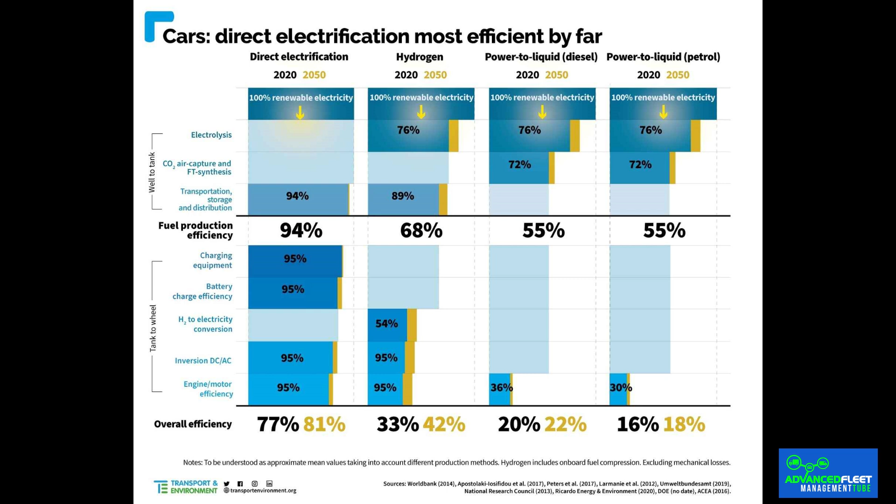Then adding transportation and distribution until final consumption by the vehicle, we would reach 33% energy efficiency for hydrogen and 77% for the electric car, and 16 and 20% for a gasoline or diesel car. By 2050, the performance of all these technologies is expected to have improved, but the differences will continue to be notable: 81% for direct electrification, 42% for hydrogen, 22% for synthetic diesel, and 18% for synthetic gasoline. Therefore, the use of batteries will continue to be a much more efficient solution for light transportation than other alternatives.

If the hydrogen car is zero emissions, where is the problem if in the end 60% of the energy generated is lost? In principle, and being from renewable sources, one might think that it is not a problem. However, energy needs are increasingly important, and at the same time, Europe has managed to consume less energy than about 10 years ago, mainly thanks to increased energy efficiency, according to the European Environment Agency.

The goal is to further reduce energy consumption despite the needs, which could also be interpreted as a way to achieve energy independence. But also, lower energy efficiency would mean a higher cost. For Transport and Environment, it is particularly evident in the case of road freight transport.

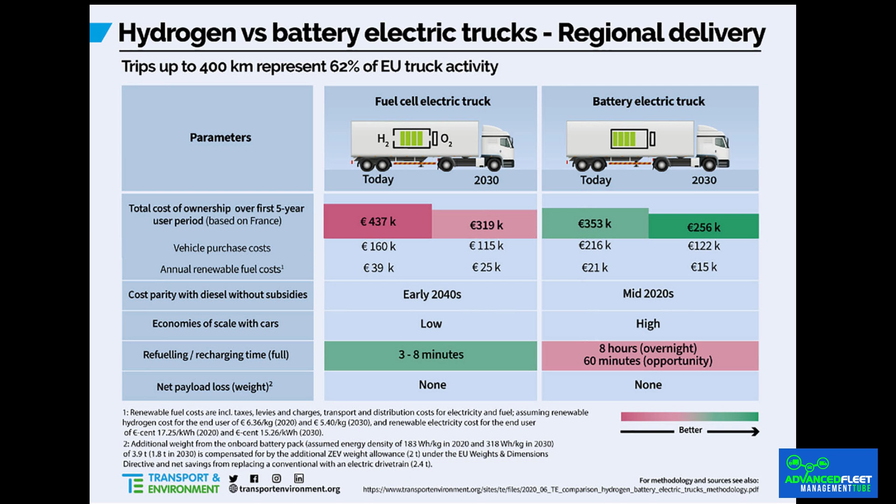Hydrogen in the transport of goods by road. In the case of road freight transport, hydrogen could still make some sense for long-distance travel. According to data from the European Commission, 62% of road freight transport journeys are less than 400 kilometers, and 78% of journeys are less than 800 kilometers, which would be equivalent to a full day of 8 to 10 hours. These are trips that you would not need to refuel or recharge to complete.

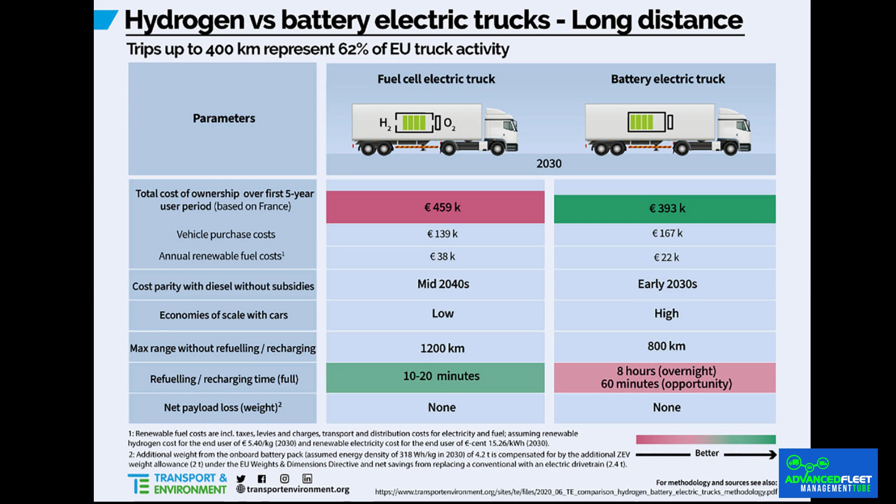Instead of having to wait 8 hours or more to recharge the battery, the hydrogen truck could refuel in 3 to 20 minutes, depending on the range you want. According to Transport and Environment, the unit cost of an electric truck will be higher than the cost of a hydrogen fuel cell truck. However, the cost of energy would play in favor of the electric truck, being cheaper than hydrogen. There is talk of €38,000 per year in the purchase of hydrogen in 2030 and €22,000 per year in electricity.

Hydrogen obstacles: lack of infrastructure and complex logistics. Currently, you won't see many hydrogen cars on the road. The enormous lack of charging infrastructure, even in Northern Europe where it is more developed, is an obvious brake on someone being able to buy this type of car. In Spain, for example, there are currently 7 hydrogen stations throughout the territory, and they are all private.

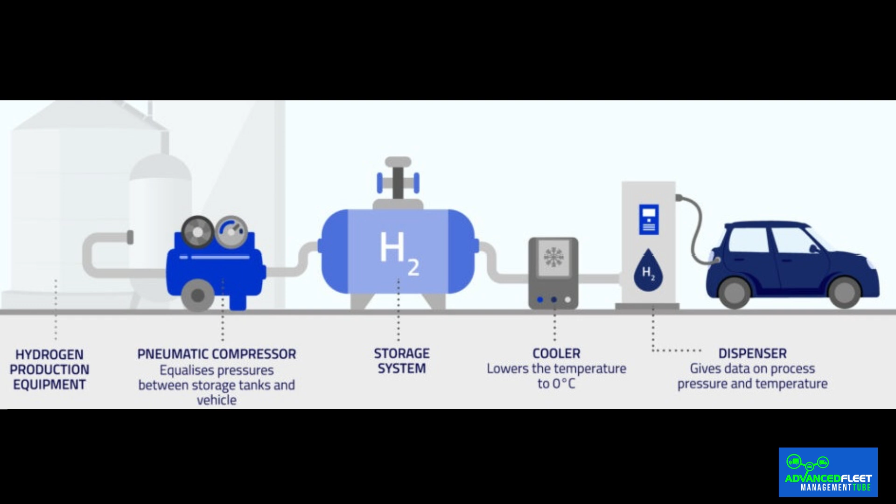This explains why, at least in Spain, Toyota does not sell its Mirai to the public, but only to companies that have a charging point. The installation cost of a hydrogen generator exceeds 1 million euros per unit and has enormous operating costs, and the legal obligation to store 1 ton, for example, does not simplify development. Several billion euros will be needed to cover an entire country.

There are only 5,000 kilometers of active hydrogen pipelines, mostly in Europe and the United States, and they are small installations with diameters of less than 45 centimeters, all above ground. There are no underwater ones, and the large part merely connects refineries with chemical complexes. There are nearly 30,000 kilometers of hydrogen pipelines in the project.

For example, the corridor that wants to link the ports of Algeciras with Rotterdam, with an investment of 3,000 million euros. But according to the International Energy Agency, only 100 kilometers of the hydrogen pipelines have firm investment. It is expensive to produce, which means that currently on the market it costs almost 8 times more than gas, 230.53 euros per megawatt hour, according to the newly arrived Hydrix index.

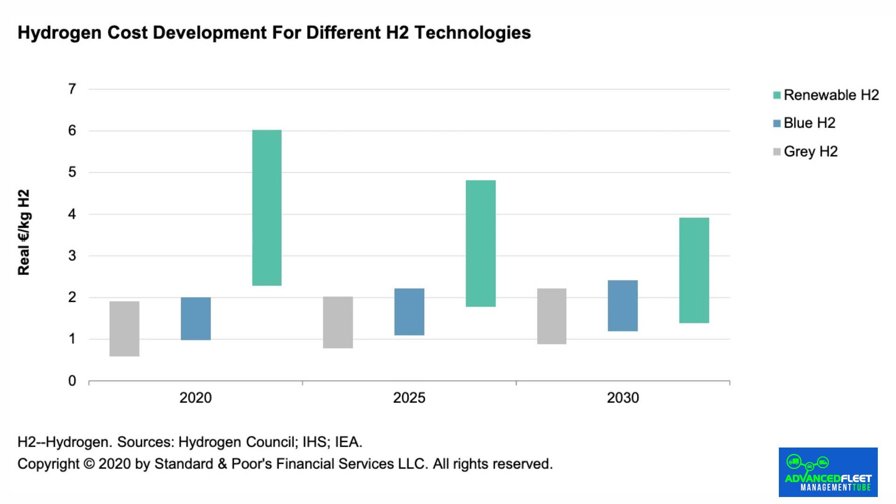The International Energy Agency estimates that in 2030, the cost of producing green hydrogen will be around $1.5 per kilogram, a figure that still seems distant. The data does not suggest that this will change in the short term. Although there are more than 40 countries with hydrogen strategies, only 4% of green or clean hydrogen projects have a firm investment decision. Hence, for example, green hydrogen, at least for now, cannot be a real alternative.

The price is prohibitive, about 18 euros per kilo, knowing that 1 kilo of hydrogen allows you to travel approximately 100 kilometers in a car. Without going into details of how much it costs to produce green hydrogen, the reality is that the price of filling the tanks of a hydrogen car is not much cheaper than recharging the battery of an electric car. In the Netherlands, with a price of 19.95 euros per kilogram, equivalent to about 40 kilowatt hours, we would pay 0.50 euros per kilowatt hour.

It is more or less the same as in most public fast charging stations, and that is whenever you want to refuel, while with an electric car you can always use much cheaper slow charges or home charging if you have a charging point, where recharging a 70 kilowatt hour battery can cost less than 17 euros, at 0.24 euros per kilowatt hour in the worst case.

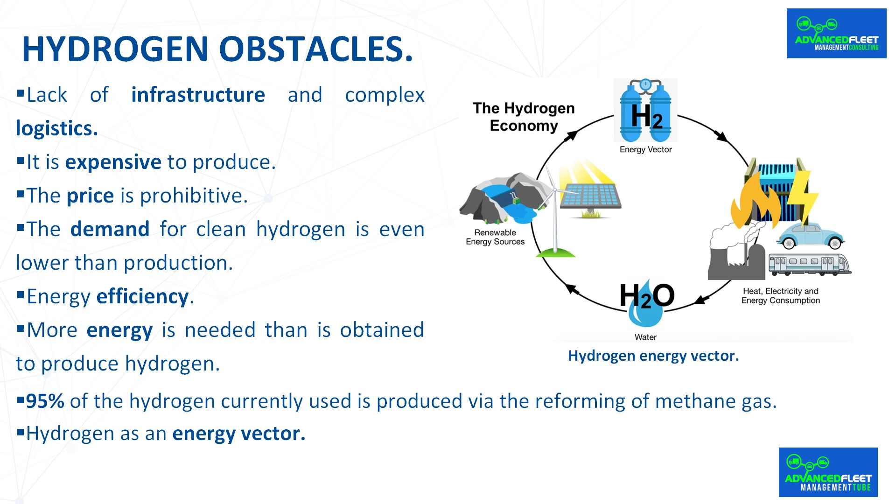Hydrogen as an energy vector. In the end, although the hydrogen fuel cell once promised to revolutionize the automotive industry, it has struggled to compete with rapid technological advances and widespread adoption of battery electric cars.

Regional production potential and investment risks. The technical potential to produce green electricity, and therefore green hydrogen, far exceeds estimated global demand. However, the ability to produce large volumes of low-cost green hydrogen varies greatly from region to region. Africa, the Americas, the Middle East, and Oceania have the greatest technical potential, but their realization depends on a number of factors, such as existing infrastructure, the current energy mix, the cost of capital, and access to the necessary technologies.

Factors such as government support, investment climate, and political stability will play a crucial role in determining whether this potential can be realized. Despite higher project financing costs in countries with higher risk profiles, green hydrogen investment is likely to continue to flow to these regions, provided the revenue potential is sufficient.

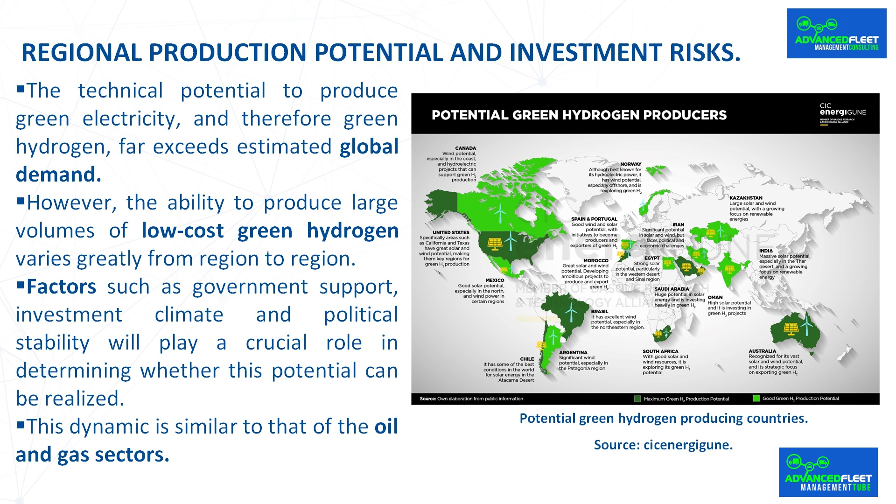This dynamic is similar to that of the oil and gas sectors, where investment often occurs despite significant national risks. However, this trend has its limits, as countries experiencing turbulence may find it difficult to attract investment due to the immense risks involved in doing business in such environments.

Ways to produce hydrogen. Hydrogen is the most abundant chemical element in nature and is a crucial resource for the energy transition. Under normal conditions, it is in a gaseous state. It is tasteless, colorless, and odorless, and it is not found freely in the environment, but is associated with other elements such as water-forming organic compounds.

As it is not a fuel that can be taken directly from nature, in order to be used in energy applications, it must first be released or separated from the rest of the elements, so it has to be produced or manufactured. Hydrogen can be produced from different raw materials, different energy sources, and by different procedures. Depending on the raw material and the energy source used to produce it, we may speak of 100% renewable, 100% fossil or hybrid processes in a certain percentage.

The color assigned to hydrogen is nothing more than a simple way to classify it based on its origin and the amount of carbon dioxide released during its generation. That is, it is a simple way to know how clean your production is, although the color scale is not yet completely homogenized. Gray hydrogen, the most common.

Currently, gray hydrogen is mainly produced derived from methane or coal. To obtain this type of hydrogen, CH4 methane or natural gas is used using the steam reforming technique. It is a cheap process, but it consumes a lot of energy because it requires very high pressures and temperatures of 800 to 900 degrees Celsius, and in addition it releases many greenhouse gases. To produce 1 ton of gray hydrogen, 9 to 12 tons of CO2 are emitted.

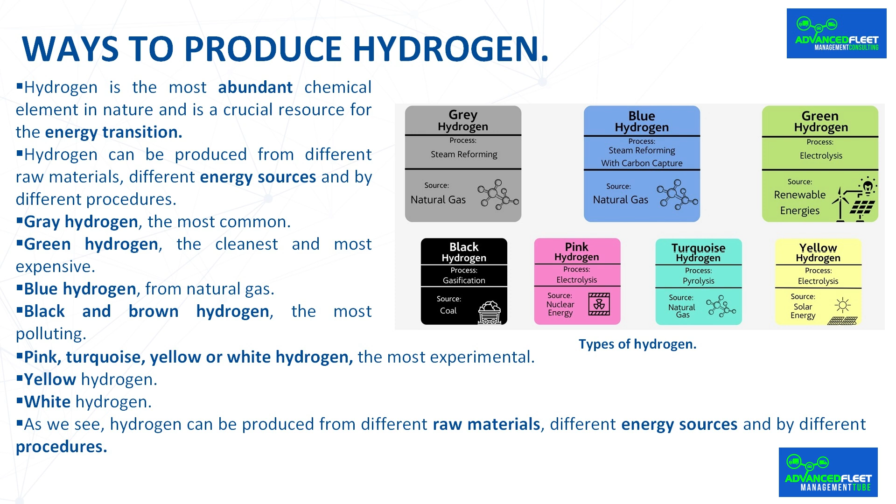As we see, hydrogen can be produced from different raw materials, different energy sources, and by different procedures. Thus, depending on the raw material and the energy source used to produce it, we can talk about 100% renewable, 100% fossil or hybrid processes in a certain percentage. According to the latest reports from the International Renewable Energy Agency, in order to meet the emissions reduction targets of the Paris Agreements, a massive expansion of hydrogen production will be necessary in the coming years.

The sustainability of green hydrogen. Green hydrogen is a goal, but it faces an obstacle: drought. Data shows that a fifth of green hydrogen projects in the United States will go to water-scarce areas, and in Spain, almost half of hydrogen projects will be in areas of high water stress. Return water to the original source, the only way to make it sustainable.

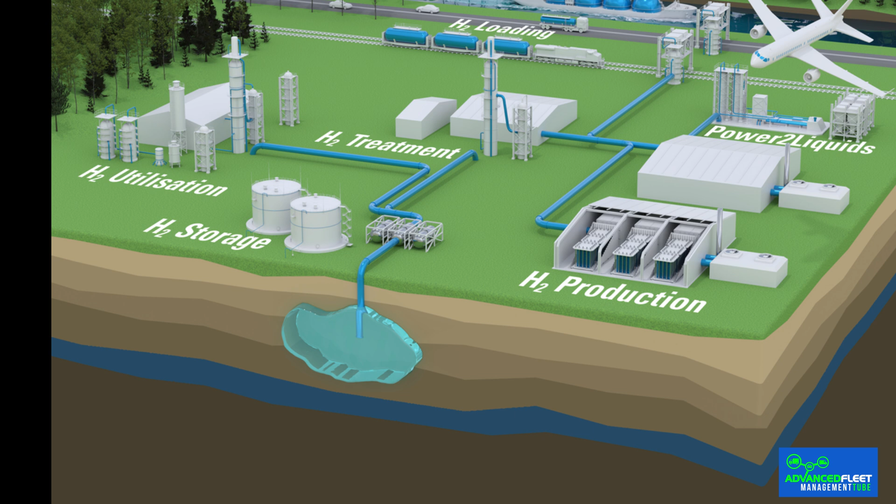A new green hydrogen plant in the Sonoran Desert, Arizona, is the perfect example of how renewable energy and new technologies confront the problem they are trying to combat: the effects of climate change. And one of the most serious is drought. This plant, which is powered by wind and solar energy, details Clean Technica, will produce hydrogen as fuel for trucks from an underground water source that experts say is not sustainable.

The 11,000 metric tons of hydrogen per year that the project plans to produce will require at least 98 million liters and will use between 121 and 170 million liters in total if the additional water needed for purification and cooling is included, according to estimates from Argonne National Laboratory Water Use. This means that if the water needed to produce and operate wind and solar energy is included, and if the excess water from all these processes is not pumped back to the surface or groundwater source, the plant could consume up to 1.2 billion liters of water that will disappear.

It is just one example among the many projects in the United States to produce green hydrogen, and several are located in areas where it does not rain. Of the 18 approved projects that will require a significant amount of fresh water, 4 are located in areas with high or extremely high water stress. Around the world, most green hydrogen projects are located in regions with this problem, such as the Middle East. That is, in areas where the demand for water is higher than the amount available. It is estimated that by 2050, droughts will affect more than 3/4 of the world's population, and there are already 25 countries with extreme water stress.

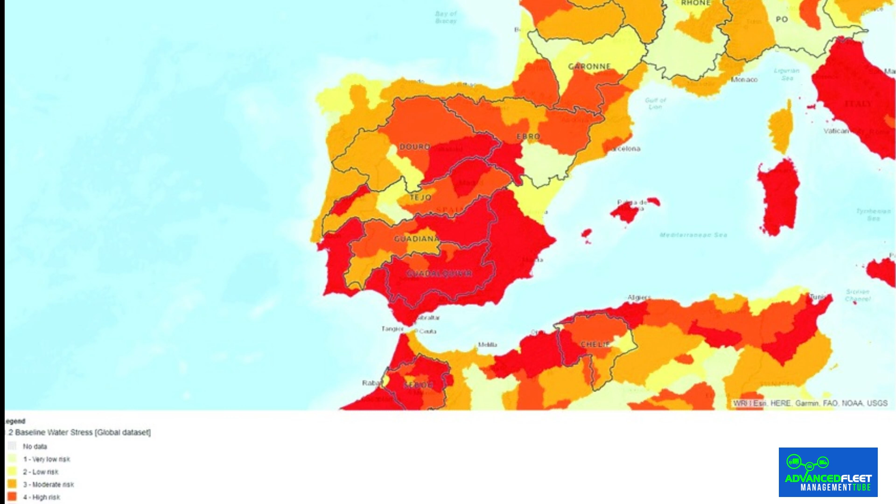In fact, more than 46% of all operational and planned blue and green hydrogen projects in Spain will be located in areas with high water stress in 2040, and more than 35% of the global green and blue hydrogen production capacity is located in regions with high water stress. Spain is in second place in terms of the number of hydrogen projects in Europe with 79, and is only surpassed by Germany, which has 104. The main problem that these projects face is drought, a situation that in Spain is increasingly serious.

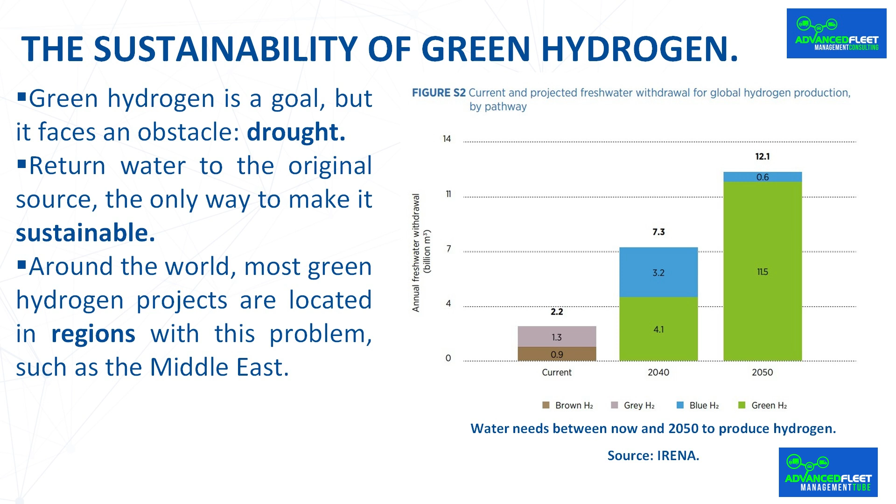One solution is to locate green hydrogen projects near photovoltaic and wind resources, as well as incentivize the use of water-saving cooling technologies, such as air cooling, and of course, avoid locating hydrogen production projects in regions where water is scarce, something that should be obvious.

Green hydrogen production. 99% of hydrogen generated in 2022 has not been green or low emissions. To produce 95 million tons of hydrogen, 900 million tons of CO2 were emitted. This is the main conclusion drawn from the recently presented Global Hydrogen Review 2023 report from the International Energy Agency. Dirty hydrogen produced from fossil fuels is what accounts for all production in practice. According to data from the European Commission, in 2022, hydrogen represented less than 2% of Europe's energy consumption and was mainly used to produce chemicals such as plastics and fertilizers. 96% of this hydrogen was produced with natural gas, generating significant CO2 emissions. Only 0.6% of the hydrogen produced is clean.

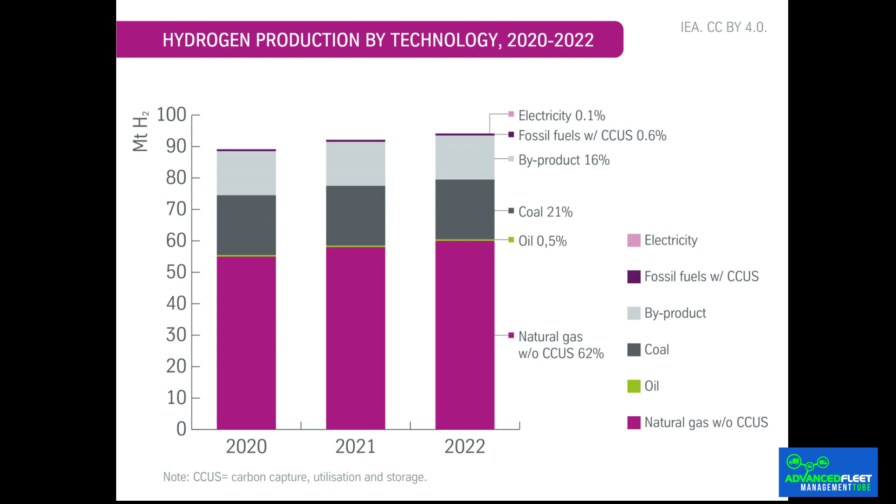Although hydrogen is the most abundant element in the periodic table on Earth, it never appears alone, but rather as a chemical compound associated with other elements. In order to use it as a source of clean energy, it must be extracted through production processes that are highly polluting or have a high energy cost. Grey hydrogen obtained from methane is the most common. The minority ones are green hydrogen, which is produced by electrolysis of water using renewable energy, and blue hydrogen from natural gas capturing CO2. Last year, only 0.6% of the 95 million tons of hydrogen produced was clean hydrogen. This should be the basis on which a real future decarbonization of industry and transport is based.

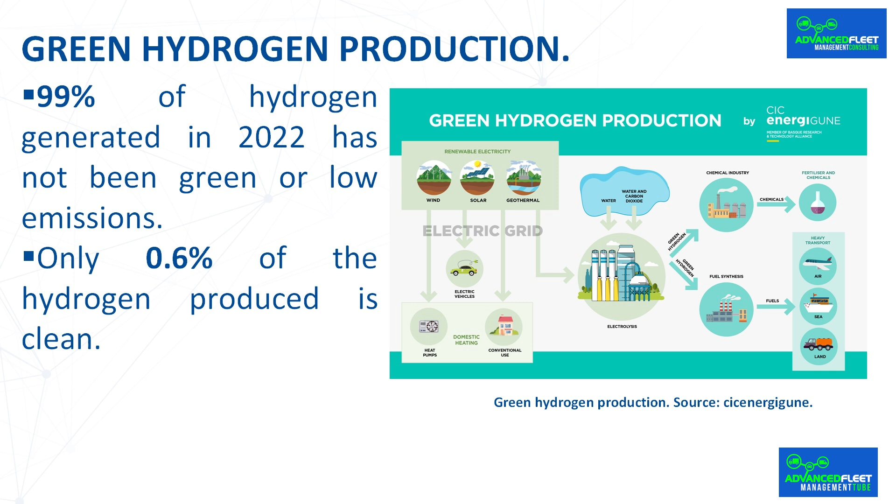Meanwhile, the production of 95 million tons of hydrogen has left 900 million tons of CO2. Although the production of a ton of hydrogen is more polluting than the burning of a ton of coal, 9.47 and 2.88 tons of CO2 respectively, the energy production is also much higher, 40 kilowatt-hours per kilogram and 7.25 kilowatt-hours per kilogram.